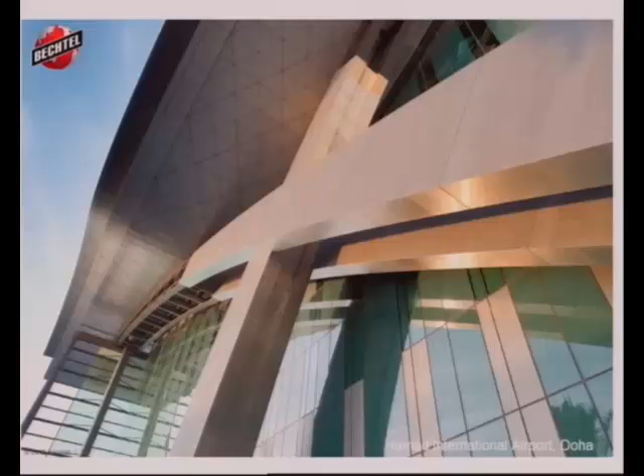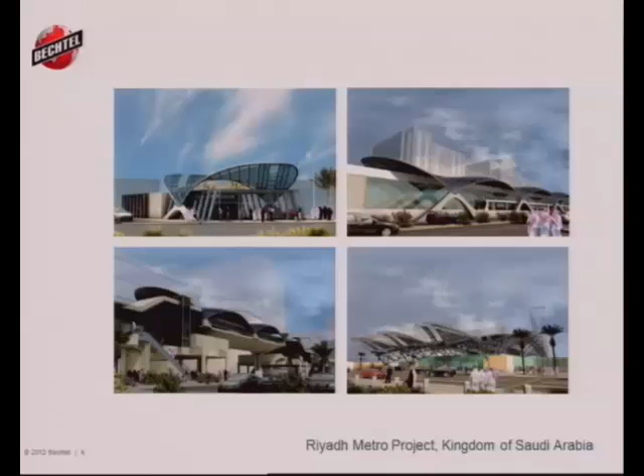And in the region, we're just completing EPCM services on the new Hamad International Airport in Doha. As my colleagues at CCC said, we've just inked a massive project for 2 lines of the Riyadh Metro project with CCC and Al Mabani. And of course, we're over in Muscat, where we're leading a consortium on an EPC contract to build the new terminal there.

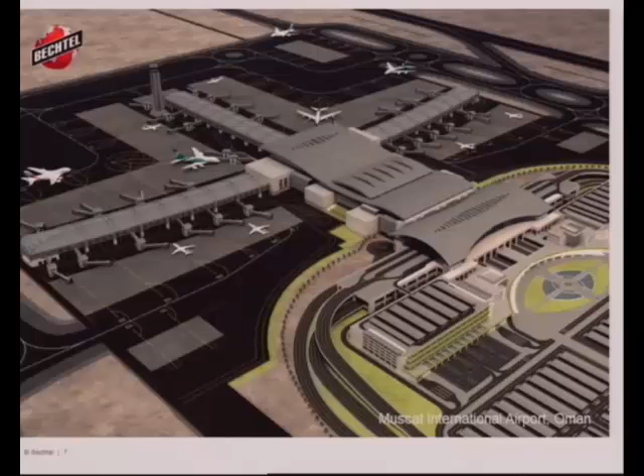I've been with Bechtel about 10 years now, and I have seen the implementation of BIM and how it's progressed at Bechtel. So pretty much every job I've worked on in the decade that I've been there has had 3D modeling or BIM of some kind.

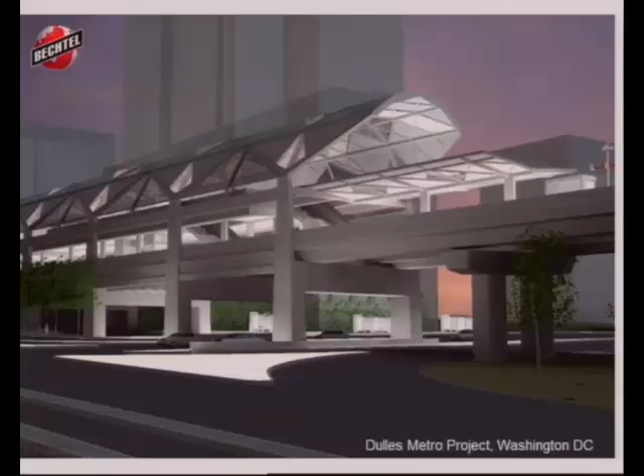I worked on a number of projects, a number of airport projects in South America and the Caribbean when I got started. I worked as a field engineer on this building, which is the St. Pancras Station in London, which was part of the high-speed 1 connection from London to Paris. Did a metro extension outside of Washington, D.C., and then was also at Gatwick, which I'll focus on for my remarks today.

So I'm not actually a BIM specialist. Most of you probably have much more expertise about BIM than I do. But I'm originally trained as an architect. I've been mainly doing engineering and construction management for most of my career at Bechtel. But I am an optimistic consumer of BIM.

I have a vision of a utopian integrated model that becomes the single source of all data for a project, as I'm sure many of you do, that I'm pushing to implement. But of course, as you know, doing that can be much more difficult in practice. And I'll go into that in my remarks.

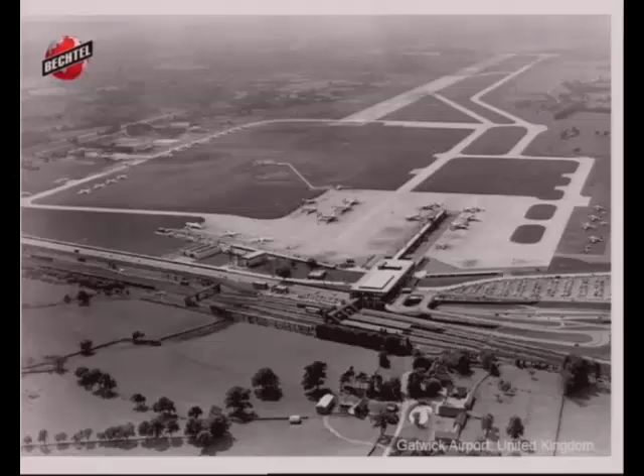It grew in small projects, a couple hundred different times. There were myriad additions made to the facility, and during all of those additions, a lot of the information became fragmented and lost. So they tried to do the right thing.

That was a big motivator in finding a better way to keep their data, because they're really thinking, how do we manage this facility for the long term?

A second big motivator is that the entire business, and remember this is a private enterprise, a commercial enterprise, relies on accurate building data. It isn't just the projects that need to be executed with the data, it's the airport operations who need to understand the data that comes out of the projects and the building. It's the commercial property, it's the finance, and of course it's the engineering and maintenance departments who need to know what they're having installed as part of the existing operational airport. So these were a big impetus to having a major change at Gatwick.

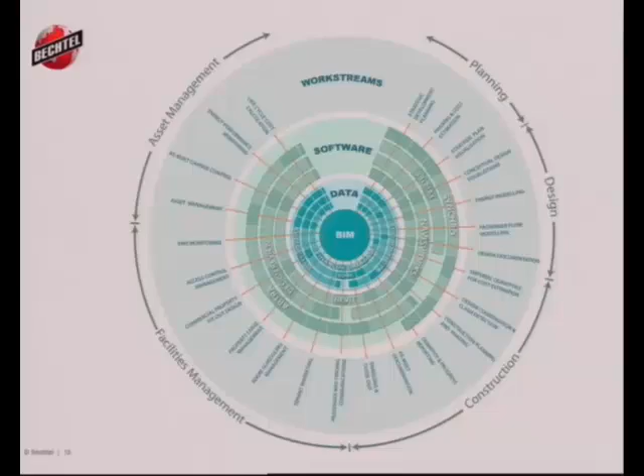To give you an example, that outer ring has construction phasing and sequencing, your typical 4D analysis. That inner ring, that inner circle, is the BIM data, the building data. That's at the core of this, right? All of these things are relative to that building information set that we're keeping.

On that next ring out is meant to show the other data sets that the business keeps. Every business, obviously it would be nice to have a single database, but that's not really practical. So in addition to the BIM data set, we also have the master schedule, document management systems, and commercial data. All of those other data sets that we might want to integrate with the building data are in that next ring out.

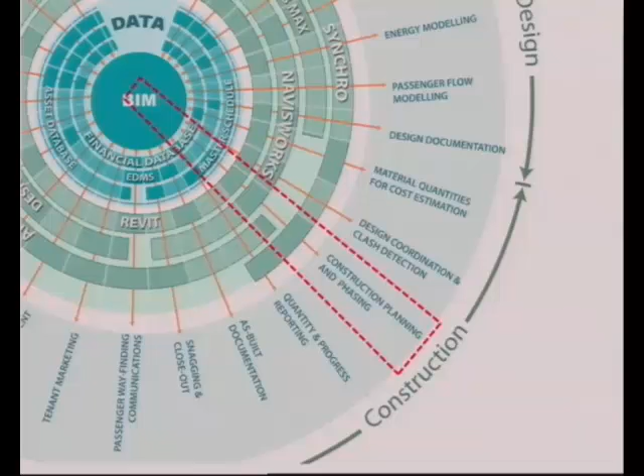Finally, all the software applications that one would need in order to connect those two are on that third ring out. So in the construction phasing example, you would want to connect your building data from your model with your master schedule, and you may want to use Synchro and Navisworks to do it, for instance, or 3DS. That's how we conceived of the model. Now it's almost comically perfect, but it gives an idea and helps describe the overall integrated model for the entire facility.

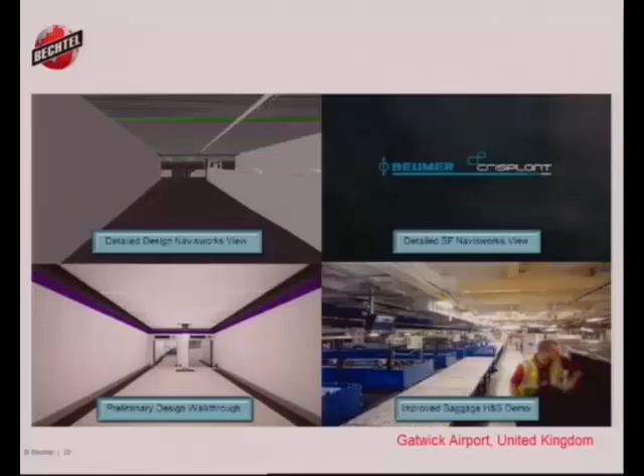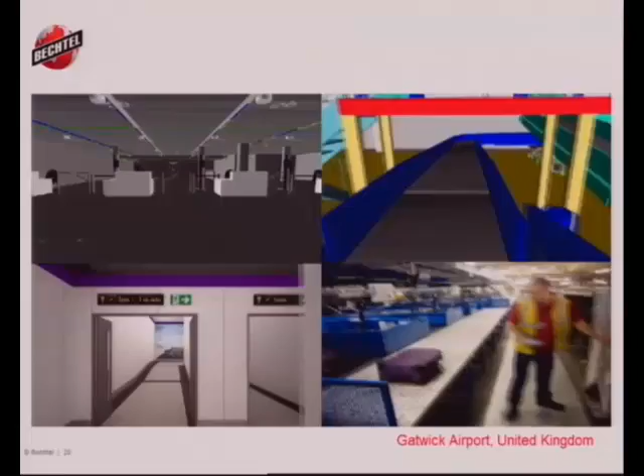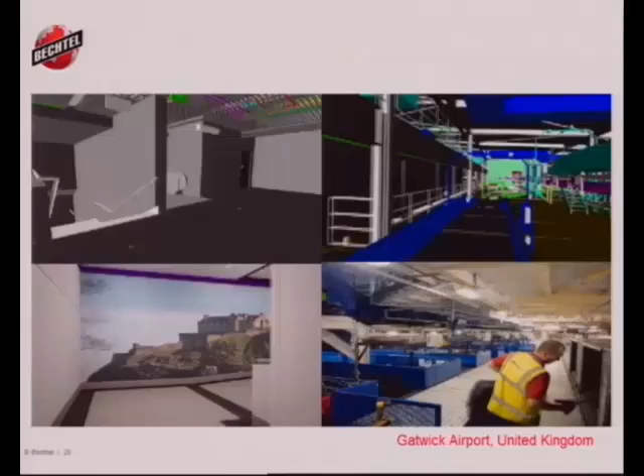So how's it going? Well, we made very rapid improvement in the data that was brought in. Now, the animations that I'm showing you now are from the largest project in the portfolio, which is about a 130 million pound combination baggage and pier project that's taking place, that's in development now.

What I like about this animation is you see the bare engineering model up there on the left-hand side. So we're walking through the model in Navisworks, and you can see the layers of information start to come out - the colors. You can start understanding more information about the building other than just how it looks. And then, of course, there's the rendered Hollywood view on the bottom left-hand side, which is also very effective, especially for a regulated airport where you're required to help all the stakeholders, all the airlines and all the government agencies and anybody else who has a stake understand what we're spending the money on.

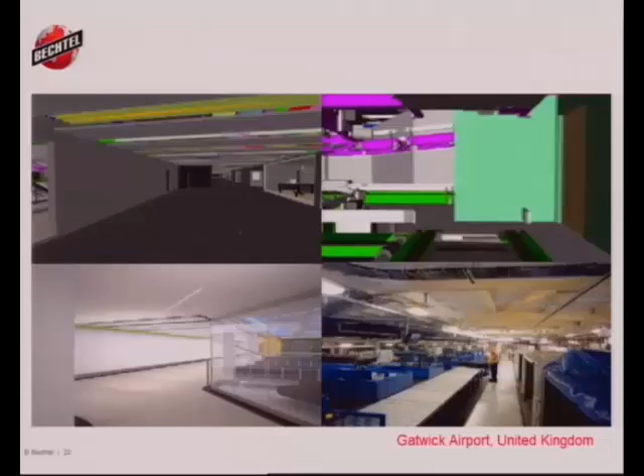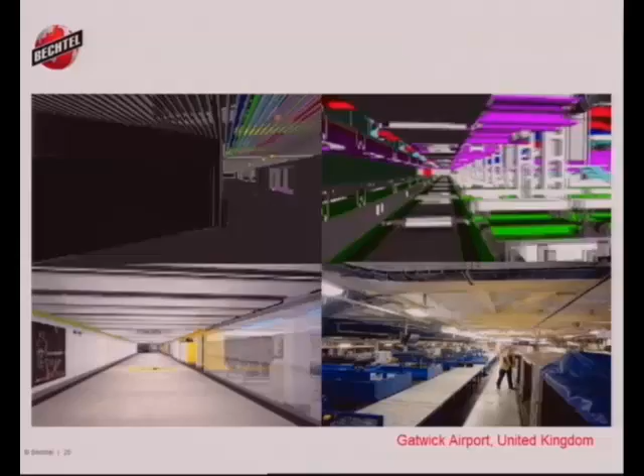On the top right-hand side is a very mechanical BIM that was produced by the baggage suppliers, Crisplant. And then on that bottom right-hand side is an actual baggage handler using a prototype of that very equipment. So we're getting a lot of really good information like this that's pouring in as part of these projects.

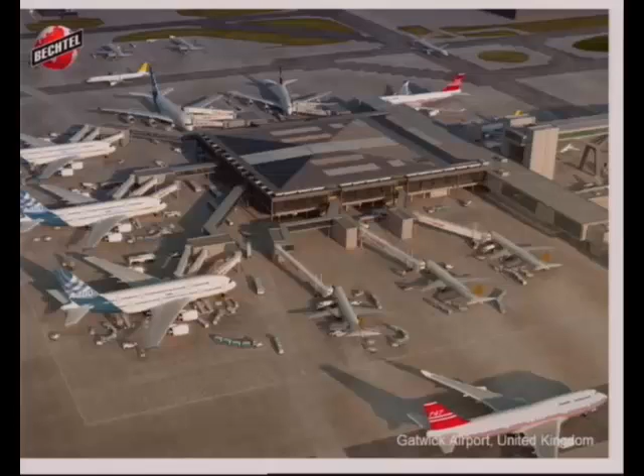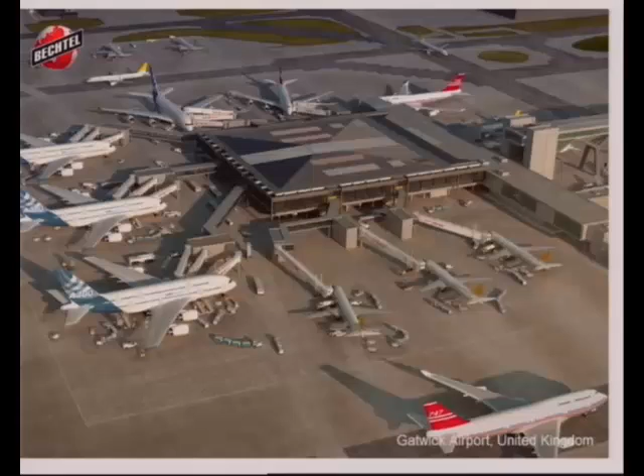This is another example from the portfolio, which is a model that was done by Atkins. This is a design for the south extension at Gatwick of Pier 6, which is over there on the right-hand side of the picture. Now again, this is a very nice rendered view of the project and of the design, which is, I think, a very impressive rendering.

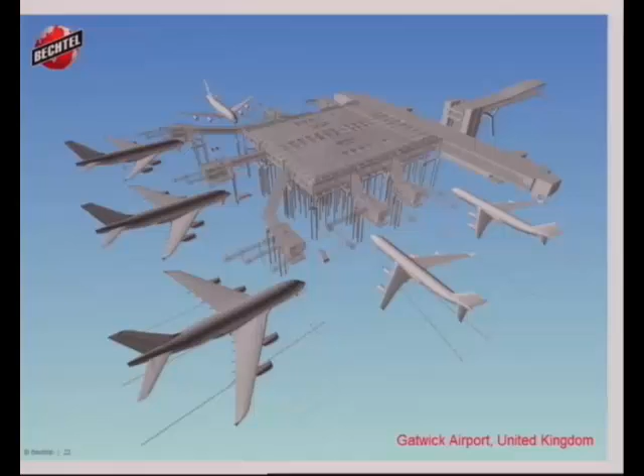Looks very good. But what I really like is that it has this behind it, because I find this much more interesting. This is again what I call the engineering model. It is the model out of Navis, as seen in Navis, and the reason why I think this is so much more rich is because it means there's data behind it. Now, you can have this type of thing without creating a data-rich model, but this really tells you that we have parametric objects, they have intelligence, that we're creating a data set more than we are just a picture.

Another quick improvement that we saw being made was that we started getting tighter procurement on projects. So we didn't have a whole lot of data points to review on this, but traditionally we had about a 12% spread between price when we bid a project. Now you can go into the reasons why on that.

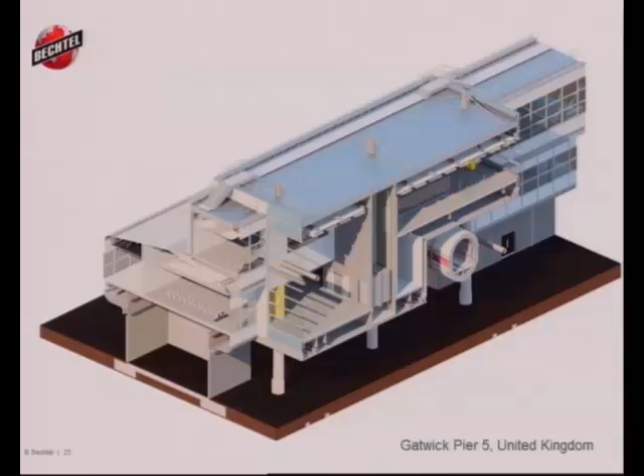That gets rather complicated, but after we introduced BIM, the process was that we as Gatwick would do the design in BIM. We would give the model to the bidders, and then they have a complete data set that they can go out and price. So they don't have to spend their time trying to estimate the quantities and things. And so we ended up with a 5 to 6% spread after that. So it was a dramatic improvement. I think we have to get some more data to really find out how accurate that is. But I think it was a quick win.

And Gatwick wants to know the value of every single asset in their entire portfolio. So they have hundreds of thousands of assets in this database, and they track the value of those assets, and they track the assets themselves in Maximo. So Maximo is a really big tool for Gatwick. And so what we did, we took the model, put it into Glue, and integrated it right inside of Maximo. So the Maximo operators were able to get inside the model and actually pull the data from the model that came out of Maximo, if that makes sense.

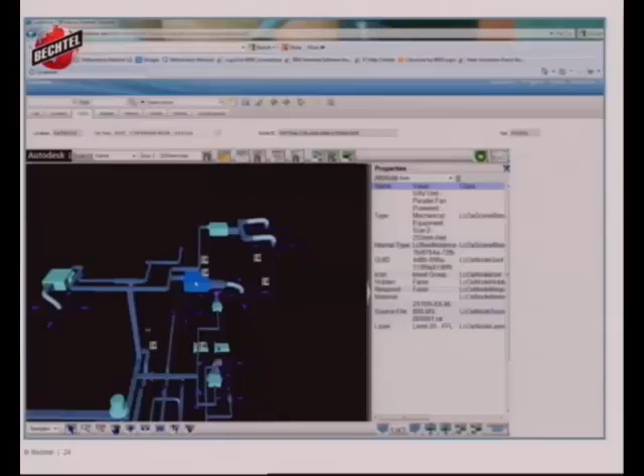So what you're seeing here is the HVAC system in a particular building that you can click on an air handler and say, that air handler was serviced at this time. It costs this much. Its next maintenance date is this, et cetera, et cetera, et cetera. So that gives the business a real good vision for how to use this data.

Another big initiative we were working on is called our augmented reality initiative. What we're doing is taking the building information models and overlaying them within the camera of an iPad using a tool called Junaio AR.

That allows you to see a model within the image of a camera, and then be able to access the other data sets within that model. So that was a trial that allowed you to pull out the drawings from the EDMS while you viewed what the model will look like in a particular space.

This is something that Bechtel is really interested in spending a lot of effort on. And Gatwick, for their purposes, really wants to be able to walk into any room in their very complicated and very old facility, point an iPad at the wall, see what's behind it, and take information off of it. With this type of tool, and with accurate models, they'll be able to do that. So from the owner's perspective, this has a tremendous amount of value.